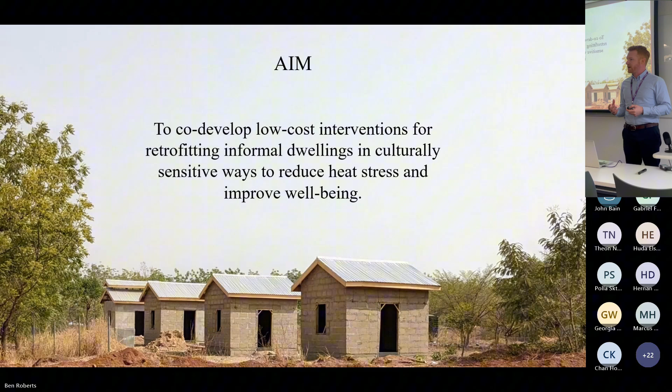The aim of the project was to co-develop low-cost interventions for retrofitting informal dwellings in culturally sensitive ways to reduce heat stress and improve well-being.

Just to say, I'm standing at the front here, but there's a big team involved both in the UK and Ghana. This was the REFIT project, reducing impacts of extreme heat to improve well-being in cities, led by Professor Kate Gough at Loughborough University, recently moved to Lund University in Sweden.

Half the team were from Ghana and the other half of the team were from the UK, and I was the researcher on the project.

Also, a big thank you to our advisory board. We worked with people who are in charge of the Ghana Health Service, Ghanaian building regulations. We had people from government, industry, architects. These are really important to the way we adapted our culturally sensitive, appropriate retrofits.

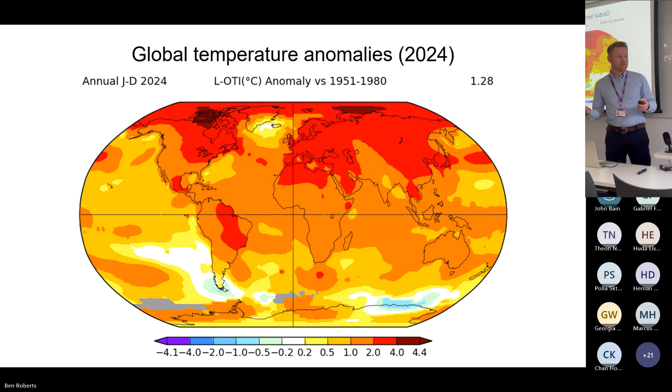I probably don't need to tell you this, but the climate is warming. This is 1965, 2004, 2024. We're having a massive amount of surface warming, which is going to hit tropical Africa particularly hard. Temperatures are going to increase in tropical Africa more rapidly than elsewhere in the world.

My work is centered on Ghana, a country in West Africa. We work in 2 cities, Accra in the south, Tamale in the north. 25% of the population of Ghana is poor, so not everyone has access to air conditioning, not everyone has access to the means to make expensive retrofits to their homes. So a lot of the work we did was around making sure retrofits were also affordable.

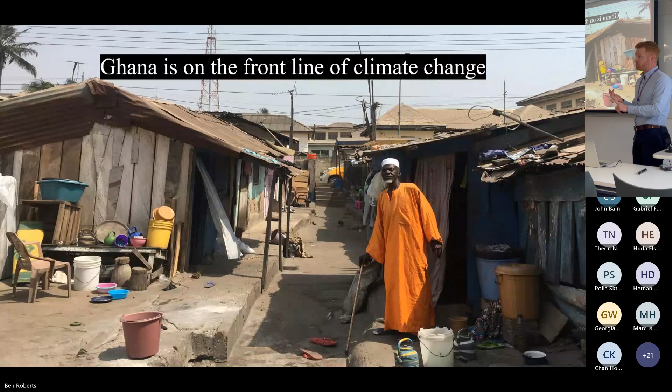But really, Ghana is on the front line of climate change: rapidly warming climate, high level of poverty in the population, inability to retrofit if you're in the poor community, unstable electricity supply in many communities, so air conditioning isn't necessarily an option.

Our work centered around these informal settlements. These are places where people don't own the land. The government owns the land, but at any point the government can come in and reclaim that land. So people here don't want to spend a lot of money on their dwellings, on their houses. They don't want to make big investments, but they're also the people who can't afford air conditioning, can't access air conditioning in very densely occupied spaces with not much fresh air, not much ventilation, exposed to the urban heat island.

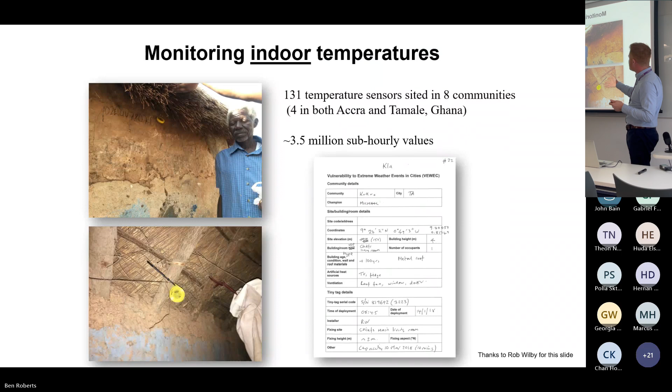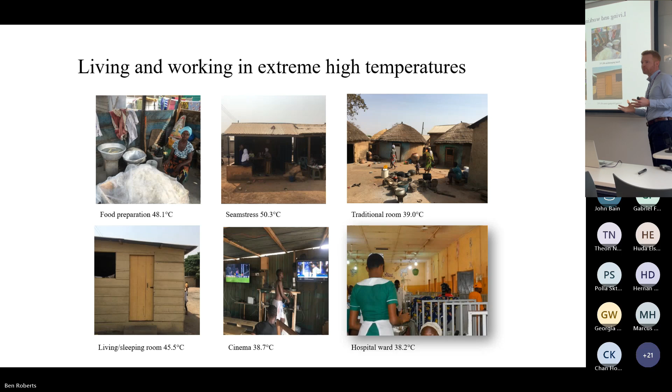We did a lot of monitoring work. We measured temperatures in 131 houses. We found some really high temperatures, 50 degrees, 38 degrees in hospital. So these are really uncomfortable, dangerous temperatures in these environments.

We found also that roof type was a key modifier of indoor temperature. So what we have here is time and temperature. In a house with a thatched roof, we got quite a stable temperature, which meant it was hotter than outside during the night, but cooler than outside during the day.

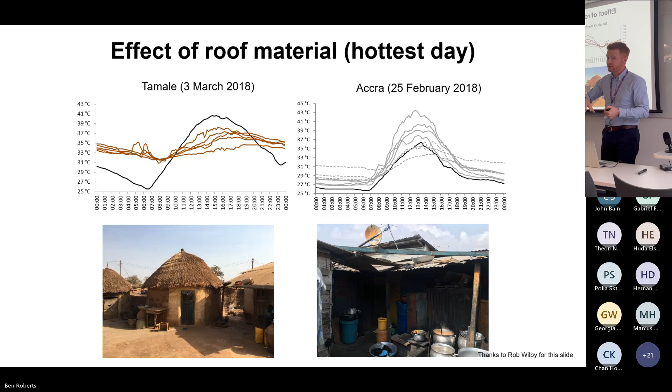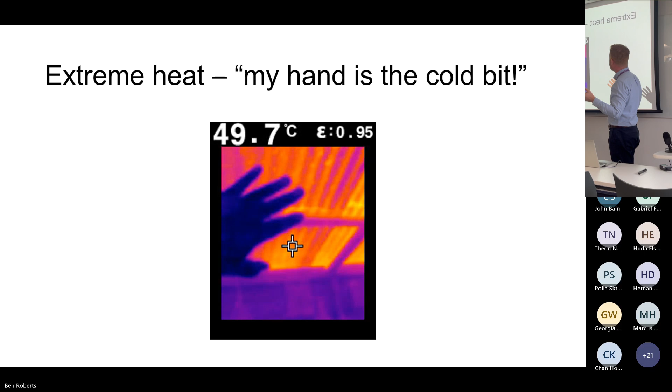Metal roofs were the complete reverse, hotter during the day but cooler during the night. So we know that building design can modify the indoor environment, and this was something I found really interesting. If you've ever played with an IR camera, you always hold it up and your hand glows white. Well, we went into a house with a metal roof, and our hand was the cold thing in the room. The metal roof was 50 degrees. That just summed it up for me that we're dealing with some extreme heat here.

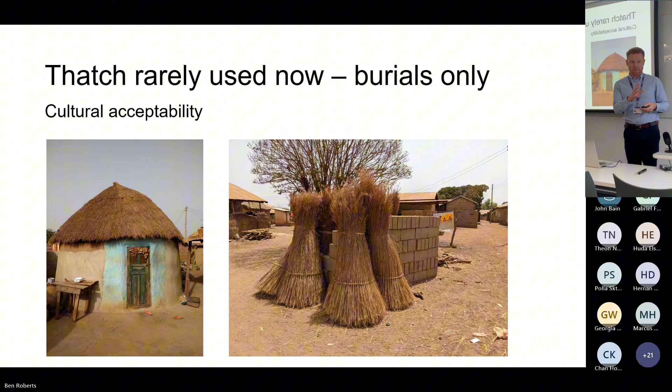So although thatched roofs are good at keeping temperatures low during the day, they're not a culturally acceptable thing to use anymore for building materials, in this part of Ghana at least, we were told.

So we had these three research questions. How do people perceive indoor temperatures? What building adaptations could we use to reduce temperatures? And then how effective might these adaptations be at reducing temperatures?

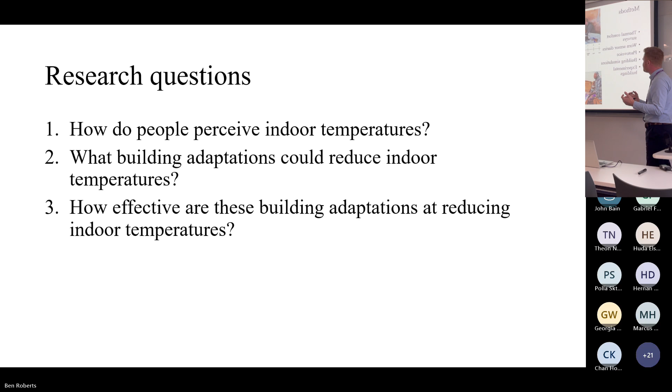We did a number of things. We did thermal comfort surveys, asking people how they felt in different environments. We used worn sensor diaries, where people wore temperature sensors on their wrists or around their necks and told us where they were and when, so we could look at the types of temperatures they were experiencing. We did Photovoice surveys where people took photos of areas where they felt hot or cold, and types of buildings they liked or didn't like, and then we did interviews.

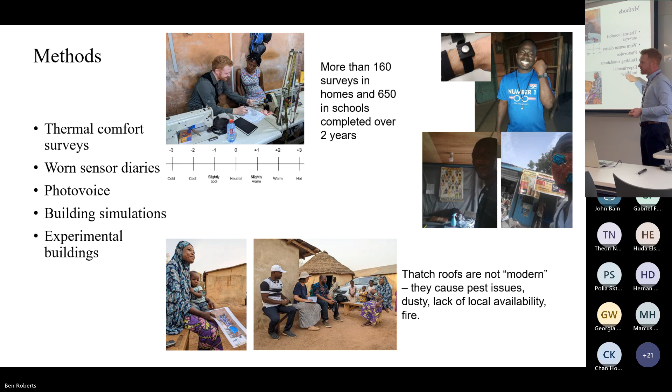This was mainly where we picked up the fact that thatched roofs aren't modern - people don't want to build in that way anymore. We also did some building simulations and experimental buildings, which is what I'm going to be talking about today. So everything we've done has been backed up by lots of interviews, speaking to people, making sure what we're doing is culturally acceptable, affordable, accessible, and available.

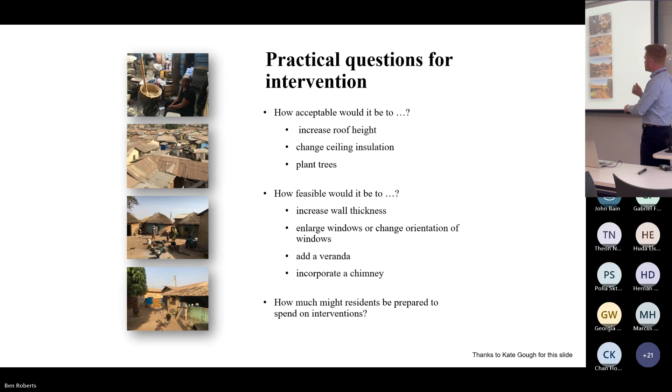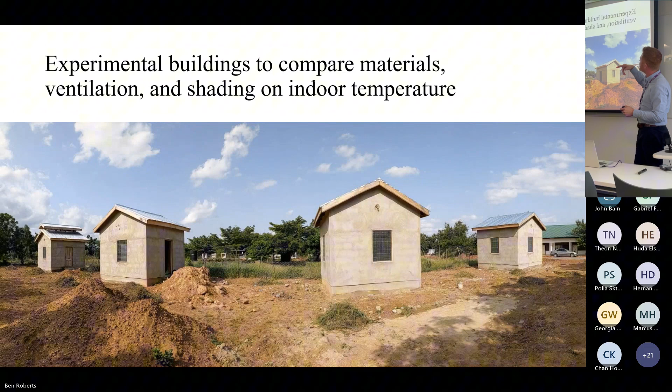So here's our four experimental buildings. We built four identical buildings to test different things like ventilation and shading on the indoor temperature.

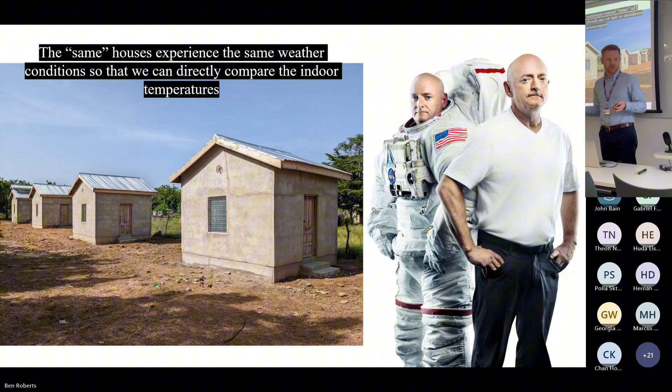I don't know if you've ever heard of the NASA twins - there's a pair of twins, one got sent up to space, one got left down on Earth. They did lots of things, then brought them back together. They'd been exposed to different environments, so they were able to compare their physiological responses. It's a twin study. We did exactly the same thing here. We've got our twins, all our houses, which are identical. If you change the ventilation in one or the other, you can compare the temperatures across to isolate the effect of different ventilation interventions. It's quite a simple but powerful method.

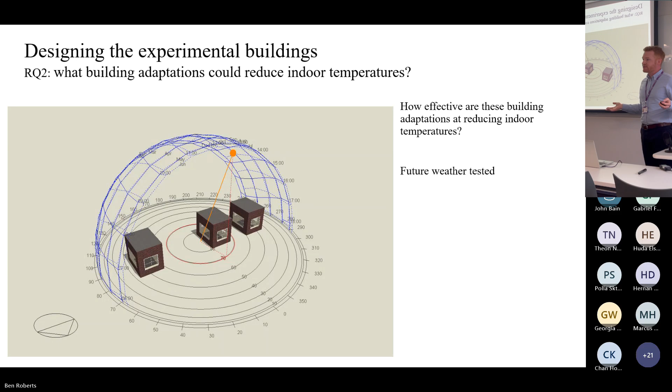Before we built our test houses, we did some building simulations using computer models. Obviously, it's a complete waste of time and money to go ahead and build four houses which actually aren't testing the right things. But we built 49 different model variants to test different types of material, ventilation, and shading.

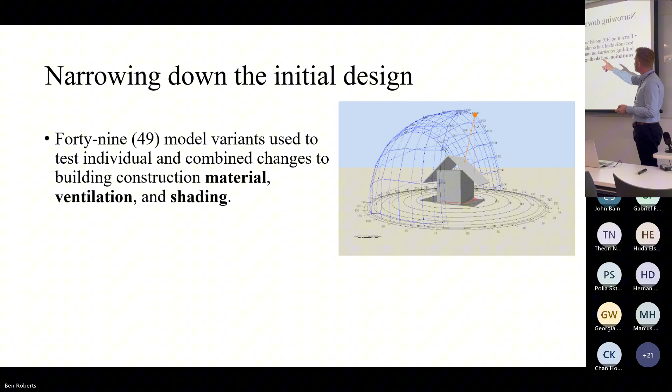And what this showed was the best thing you could do - the coolest house was one with a ventilated roof structure, remarkably like Andy's design, with an overhang and insulated ceiling. The worst thing you can do, the hottest thing, was going to be a house with a wooden wall, low thermal mass, which heats up really rapidly and gives you high peak temperatures. Thatched roofs, yeah, pretty good, but we know people don't like them - there's issues with dust, pests, and fire. So this kind of guided the ventilation systems that we trialed in our real buildings.

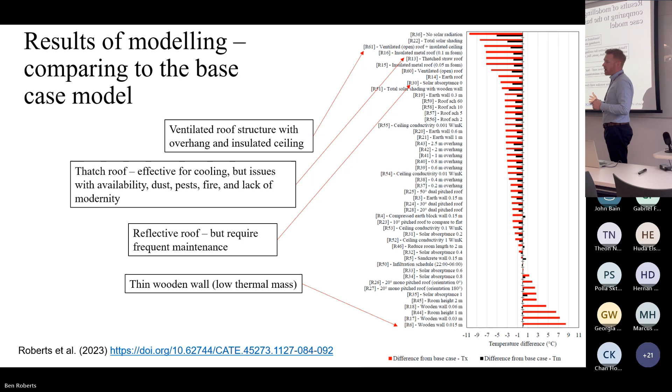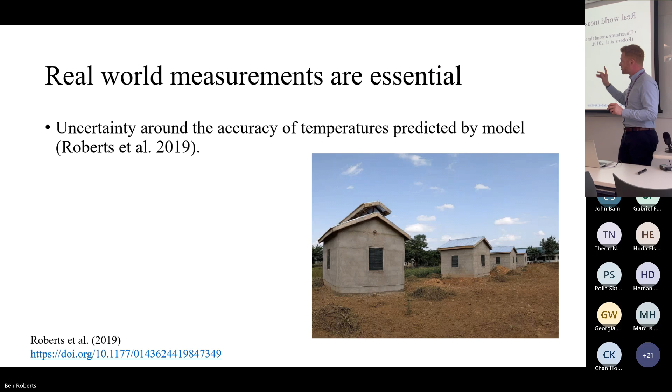Of course, this is all based on computer simulations. I've done some other research which showed that computer simulations are quite uncertain - the results you get out of them aren't necessarily what you see in reality. So it's really important that we went on to build these 4 houses.

We built it out of sandcrete. Sandcrete are these blocks you can see here - basically loads of sand, a little bit of cement, all mixed up with a bit of water, put into a metal mold, tipped out. And that's what most people in this part of Ghana were building their houses out of.

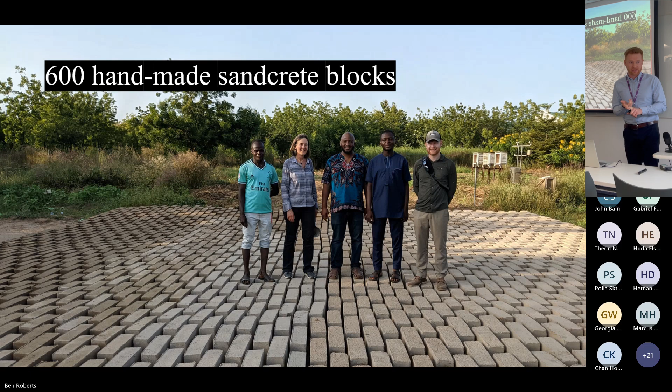We asked people, if you were going to build a new house, what would you use? They told us sandcrete - a metal roof and sandcrete walls. So that was basically our base case design for our experimental buildings.

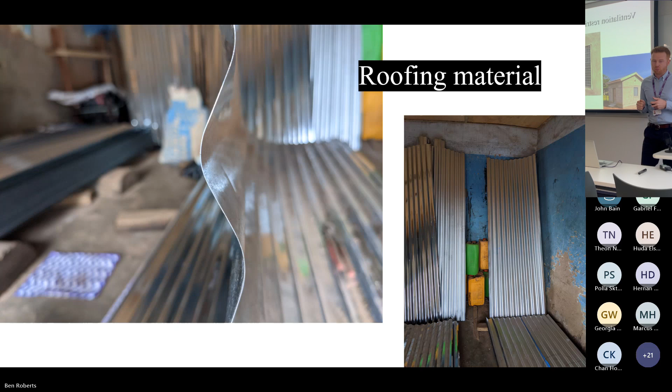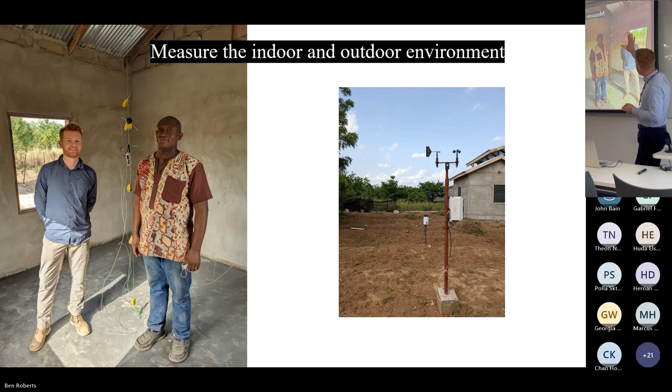We also were very realistic. We put mosquito mesh on the windows, even though no one was going to be living in these houses. And we measured the indoor temperature at all different heights, looking at temperature stratification. We measured the weather, and then we were able to answer this research question 3: how effective are these building materials or adaptations at reducing indoor temperature?

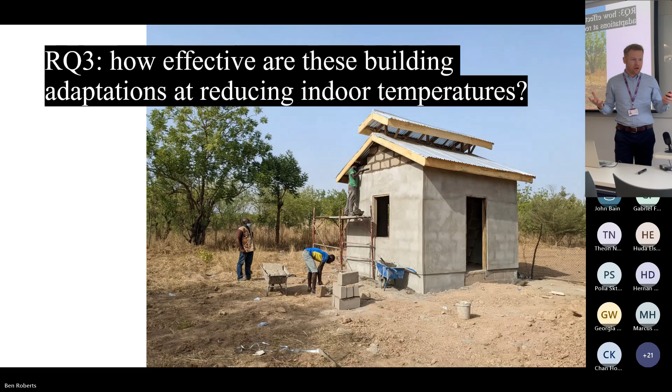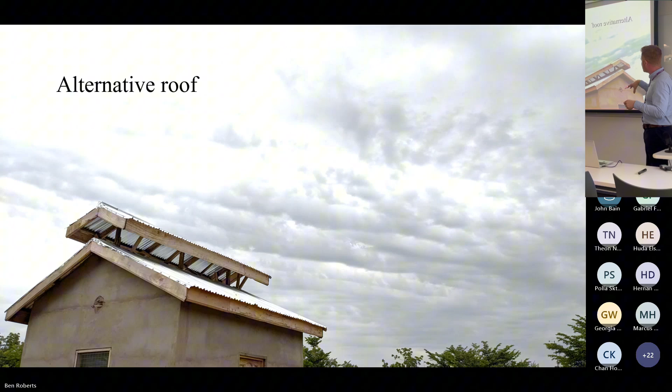This was one of the things we thought of as our main innovation - this sort of ventilated roof structure. Now, there was a bit of a miscommunication between us, the architects, and the builders. It wasn't meant to be this big, but I'll talk about that in a minute.

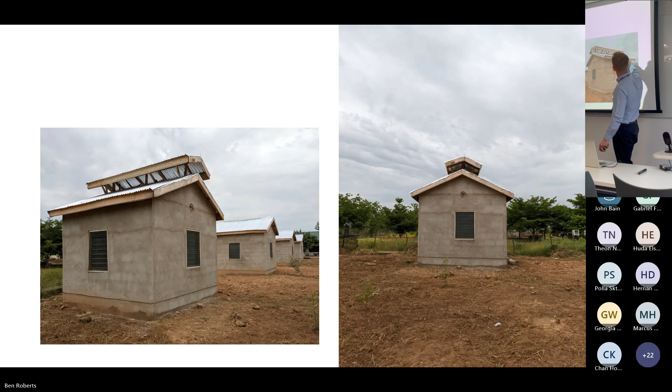And there's another example - so basically 3 identical houses, except this one's got a big open area for air to move up and out, hopefully providing cooling. We'll see. So we did 11 different tests - 11 different combinations of ventilation in all the different houses - 303 days worth of data for us to analyze.

This is what we found. Okay, how am I doing for time, Tom? 5 minutes to go. Just 7? 7, perfect - I've gained 2 minutes.

So house 1: no ceiling, windows always closed, all the way through all the tests. Remember that. Then in house 2 and 3, we open the windows. In house 4, we open the windows and use this big ridge vent.

So you open your windows, you get about half a degree temperature reduction at night. You add this ridge vent as well, you get a much greater temperature reduction. This stacked ventilation - the movement of hot air up and out through the building, being replaced by cool air from the outside - is making a statistically significant cooling effect of 1.4 degrees during sleeping hours.

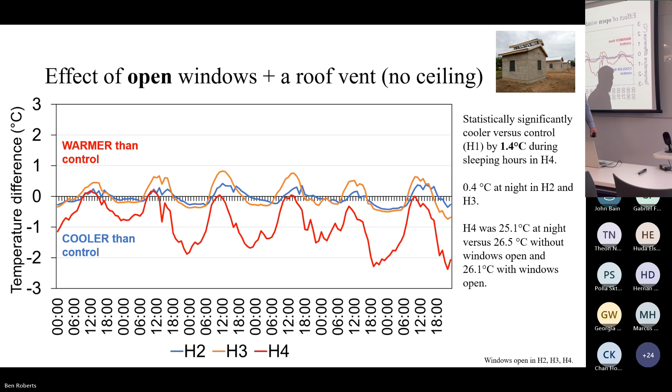So that's great - that's a significant reduction in temperature, something worthwhile doing. The issue was, this actually brought it down to 25.1 degrees inside on average. In the UK, we say if the temperature is above 26 degrees, sleep starts getting disrupted. So someone might be able to sleep more comfortably in the house with the ridge vent.

That's pretty good. What happens if we close the windows? If you close the windows in all the houses, it just completely removes the effect of that ridge vent. So the ridge vent doesn't work unless you've got windows open in combination - that's because it's shutting off the stack effect.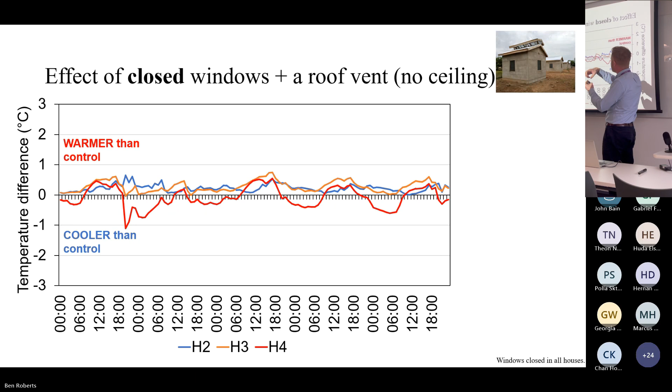Obviously the air's moving out, it needs to be replaced by air from somewhere else, otherwise we create a vacuum. So the ridge vent is only effective in combination with a window in this example.

People told us they want to have a ceiling in their houses, because it stops birds and bats and mosquitoes and things coming in through your roof into your house. So people want a ceiling. This is what happened when we put a ceiling in the house.

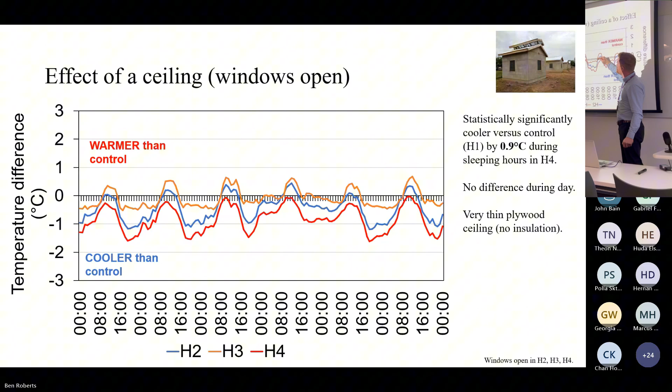The last thing to show you is whether or not you're opening a window. The windows were open in house 3 and house 4, and closed in house 2. There's a ceiling installed in all the houses apart from house 1.

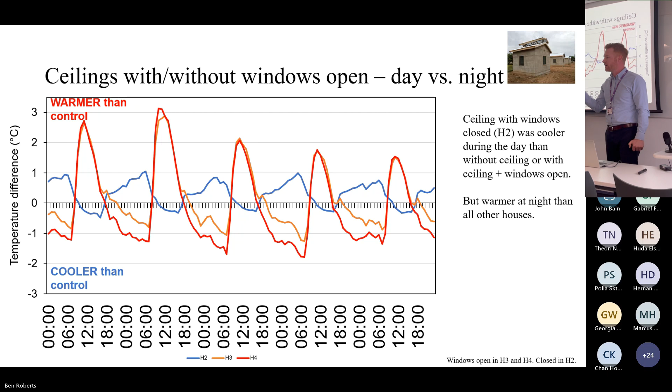What's interesting is this blue line, where there's a ceiling but no windows open. You get a little protection during the day, but at night, because you're not ventilating via the windows and ridge vent, or losing heat via the uninsulated ceiling, you get an increase in temperature difference at night, up to about 1 degree. So basically, if you're going to put a ceiling in, you must ventilate, otherwise you're going to have a problem at night.

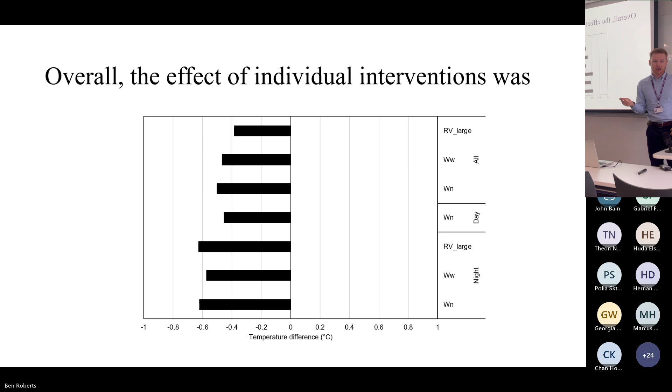Of all the different ventilation and insulation scenarios we tried, which I haven't had time to go into, the only statistically significant effects were from window opening or ridge vent opening. Nothing else was effective, which was disappointing in some ways, but also kind of what we expected.

So in summary, ventilation is important—in fact, ventilation is vital for cooling these types of dwellings. It makes roof vents more effective and counteracts the warming effect of ceilings, but they must be used at the right times. You must open your windows at the right times, because it can make it warmer during the day when it's hotter outside than in. So we need to be careful.

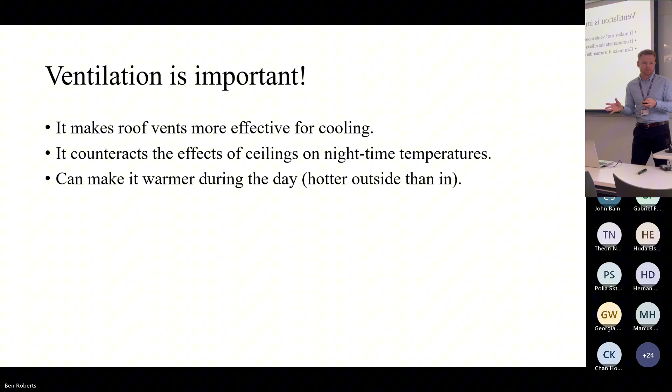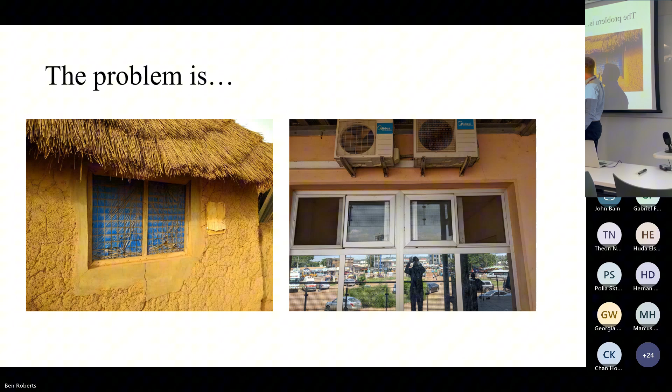Ventilation is important, but the problem is this: people are covering their windows because of dust ingress. They have big dust storms—dust comes down from the Sahara with the Harmattan winds and coats everywhere. People want to close their windows, and the sign of modernity is moving away from louver windows toward sliding windows, which don't have such a large available open area. So I've just shown you how important ventilation is, but people are actually restricting the ventilation they have available in their homes.

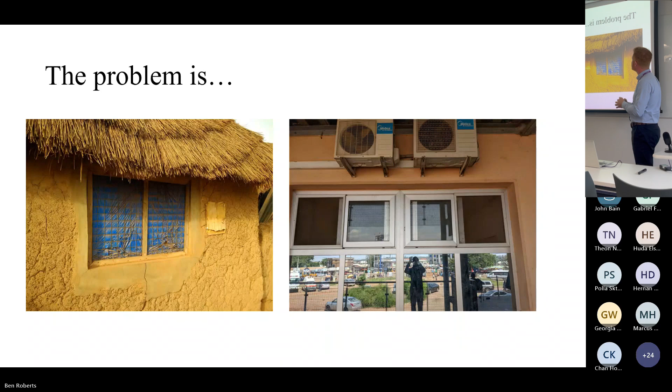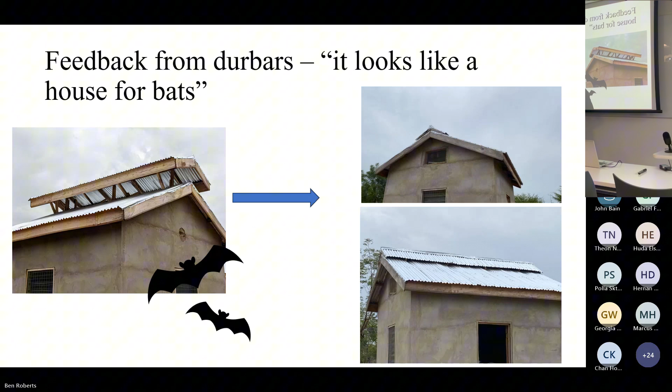We did a lot of work with the communities. We showed them our designs and told them this is effective at reducing temperatures, but people said, unfortunately, we don't like it because it looks like a house for bats—this part here is where all the bats would roost at night. So we went back to the drawing board and modified the roof, putting in a small gable vent to try to increase ventilation. Those tests haven't been analysed yet, but you can see that even if you show a community this will reduce the temperature, if it causes other problems like bats, it won't be accepted.

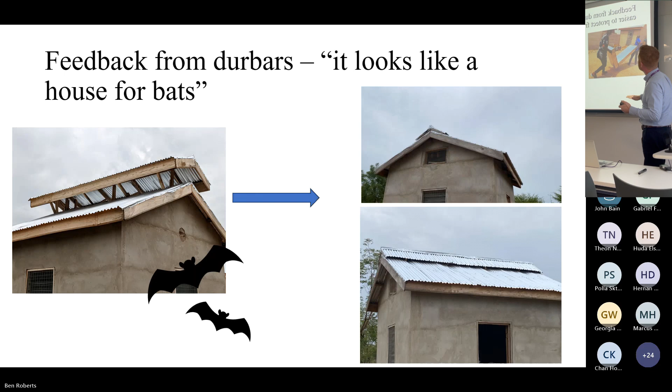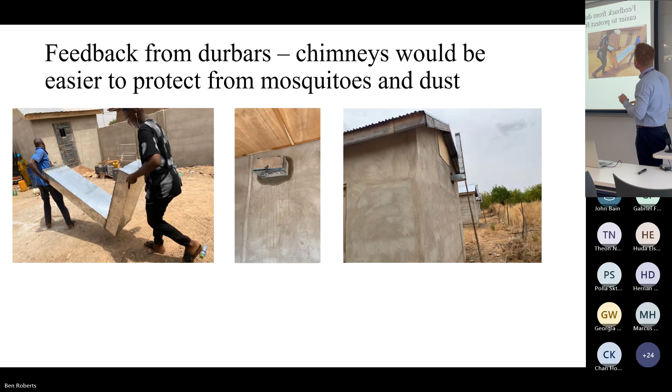We also designed this chimney, because we got feedback saying the ridge vent would let mosquitoes in. So we tried this chimney with mosquito mesh around the top, which you can open and close, again trying to allow ventilation out of the occupied space without letting in bats, mosquitoes, or dust. We've got a few more tests to analyse—the smaller ridge vent, the gable vent, and the chimney.

We're now concerned with occupant behaviour in these houses, or with roof colour or vegetation. I can see Tom's ready, so I'm not going to go into why—happy to answer that in the Q&A. But thank you very much for listening.